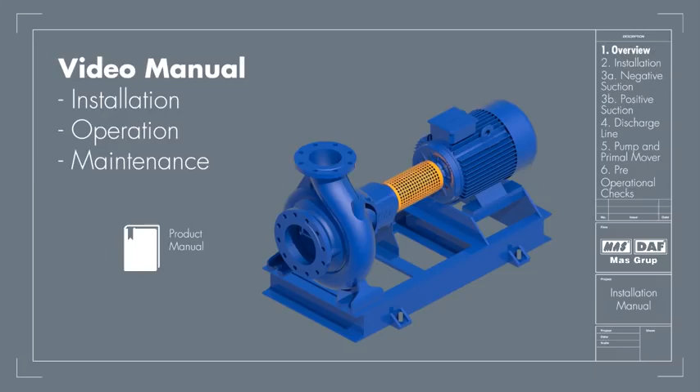Welcome to the General Video Reference and Guide. Please read the product manual before installing the machine to get knowledge of how the pump works and how to install it. This is a brief overview and demonstration of the entire process covering the key points.

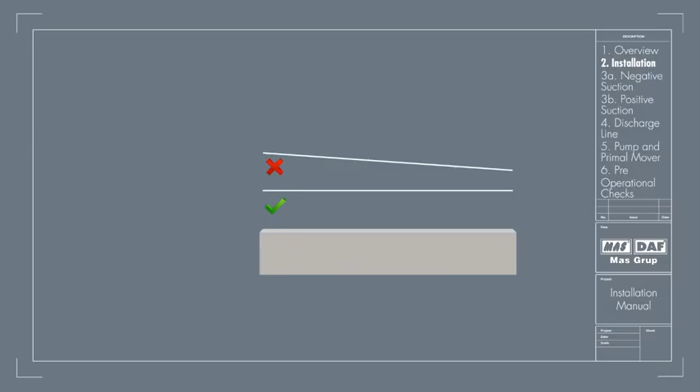Installation. Before installing the pump, ensure that the foundation on which the pump will be installed is prepared well. It has to be sufficient enough to take the weight of the pump and absorb any possible vibrations from it. The foundation has to be absolutely straight without any inclination. The foundation bolt of proper size should be embedded in the concrete and base plate.

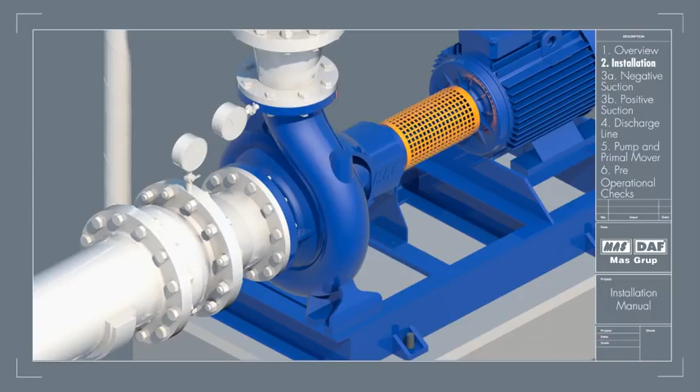Piping associated with the pump must be supported independently of the pump and should never put any strain on the pump casing. When the pipes are not supported, their weight is carried by the pump casing, and this situation may cause cracks on the pump casing. It's important that the connections are aligned axially, angularly, and in length carefully.

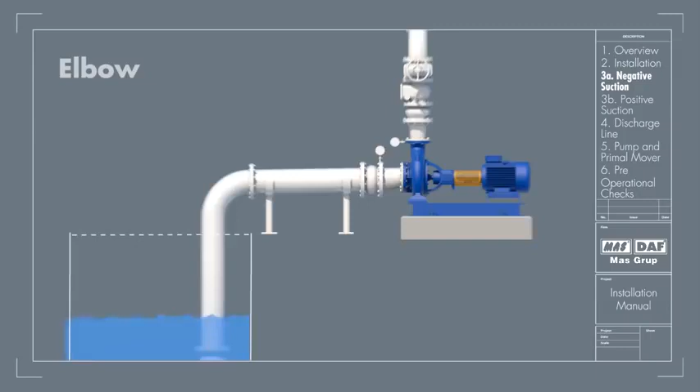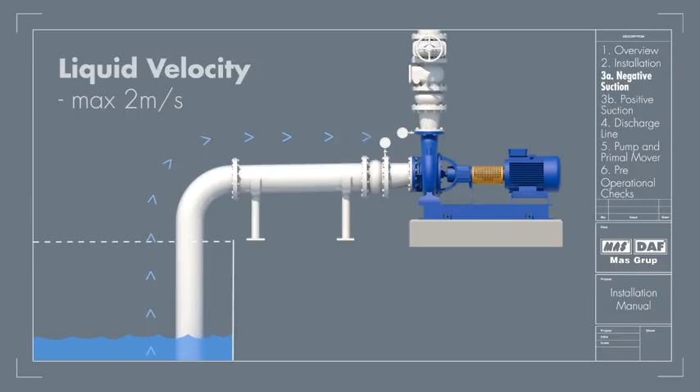Suction line, negative suction. The piping and the connection fittings should be properly aligned and supported separately. The elbow should be of long radius type. All suction piping must be airtight. The suction pipe should be sized to ensure a liquid velocity of not more than 2 meters per second. The suction pipe's size should be at least one commercial size larger than the pump inlet.

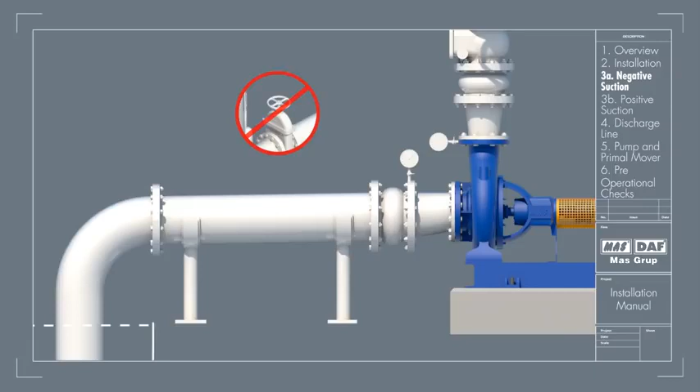All suction pipes should have a continuous rise to the pump suction inlet. 6 mm to 100 mm slope is recommended. No isolation valve is recommended. There should be a pressure tapping provided for installing a vacuum gauge in the suction line.

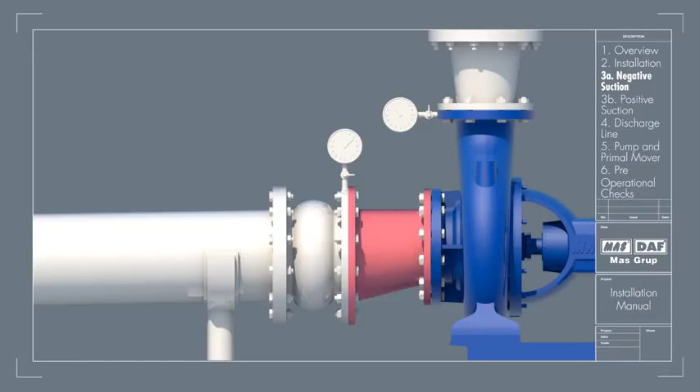The reducer joining the straight length of the pipe in the pump line should be an eccentric reducer with the inclined side of the reducer as the bottom side. The straight length of the pipe after the eccentric reducer should be 2 times the pipe diameter. The suction strainer must be at least 4 times the suction pipe area, and the mesh size should screen out solid particles that would clog the impeller.

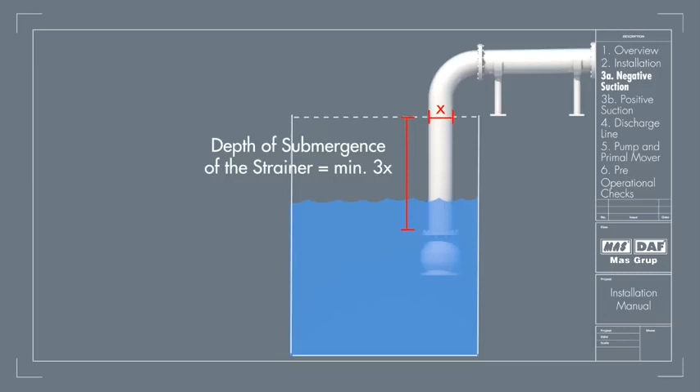The minimum depth of submergence of the strainer should be at least 3 times the pipe diameter, measured from the upper row of holes of the strainer. The distance between the bottom of the strainer and the floor of the tank should be 2 times the pipe diameter.

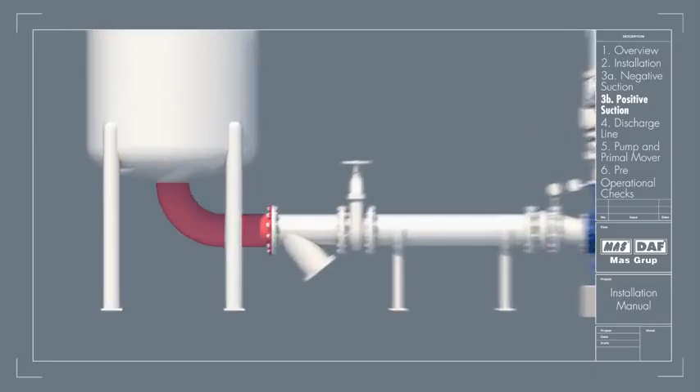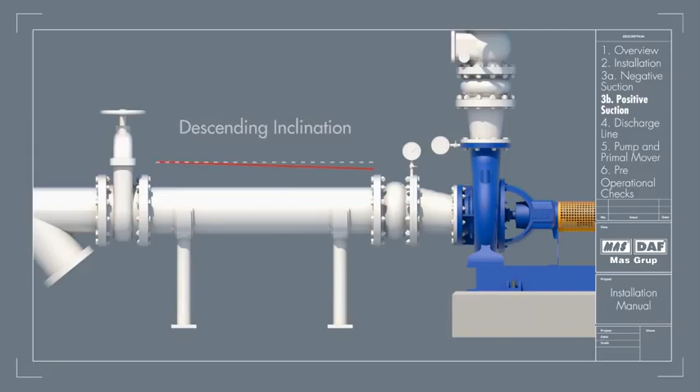Suction line, positive suction. In case the water is being supplied to the suction through gravity, a slightly different setup is needed. The elbow should be standard type or long radius type. An isolation valve should be provided in the suction line. The pipe from the tank to the pump should have a descending inclination. The straight length of pipe between the pump inlet and tank should be at least 3 to 6 times the pipe diameter.

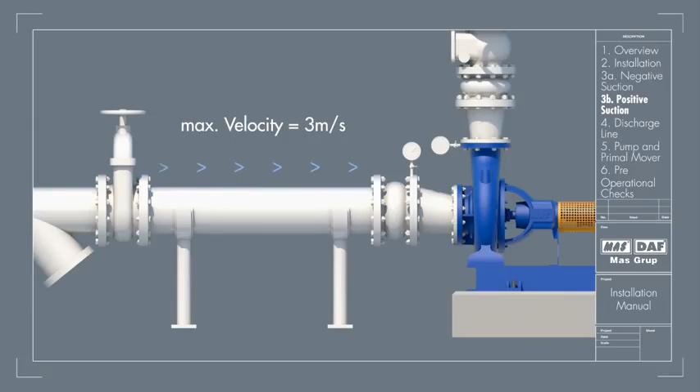The suction pipe should be sized to ensure a max liquid velocity of 3 meters per second. There should be a pressure tapping provided for installing a vacuum gauge in the suction line. The reducer joining the straight length of the pipe in the pump line should be an eccentric reducer with the inclined side of the reducer as the bottom side.

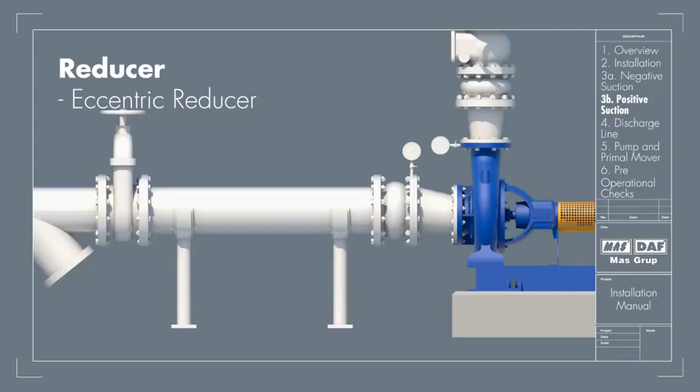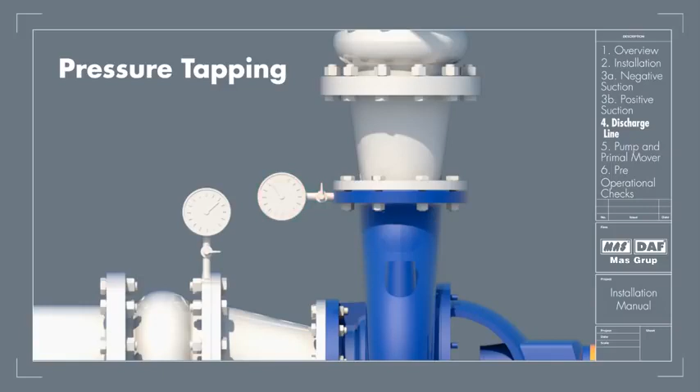Discharge line. There should be a pressure tapping as close to the pump outlet and before the isolation valve as possible to measure the pump shutoff head. A concentric reducer is installed on the discharge side to minimize the friction losses. To prevent reverse flow and protect the pump from hydraulic shocks, a check valve has to be used in the discharge line.

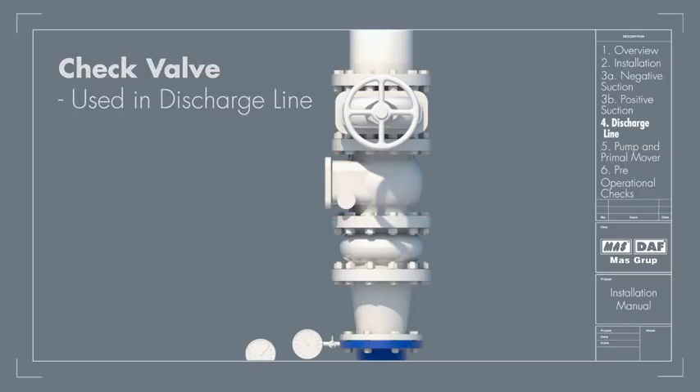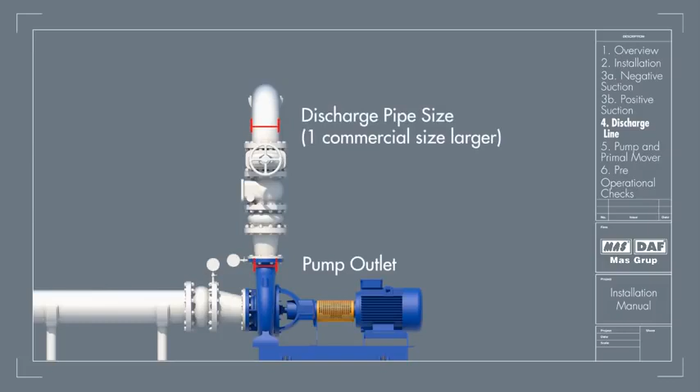The isolation valve is provided downstream of the check valve so that these can be taken up for maintenance, priming, and starting whenever required. Discharge pipe size should be at least 1 commercial size larger than the opening of the pump outlet. The number of fittings and size changes should be minimized to prevent fluid friction losses. Expansion joints may be used only after a careful piping analysis, especially when the discharge pressures are on the higher side.

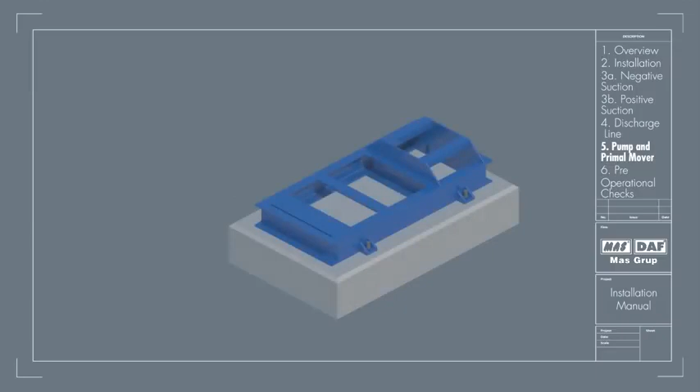Installation of pump and prime mover. The pump unit needs to be fitted using nuts and bolts before fitting in any pipes. The pump and the motor are aligned to the final tolerance using a reverse dial gauge or laser alignment tool. After the alignment is completed, the piping connected with the pump should be built. Once this is completed, the alignment of the coupling should be rechecked.

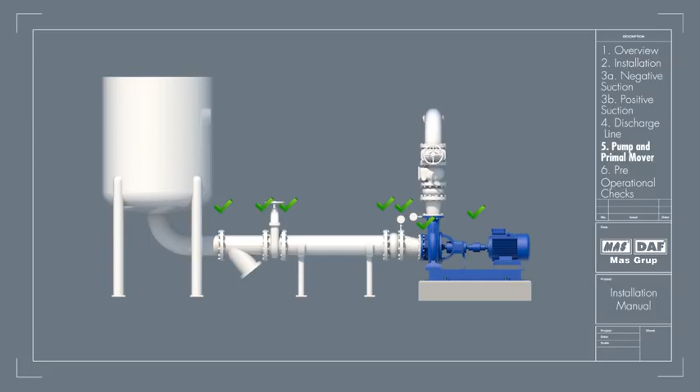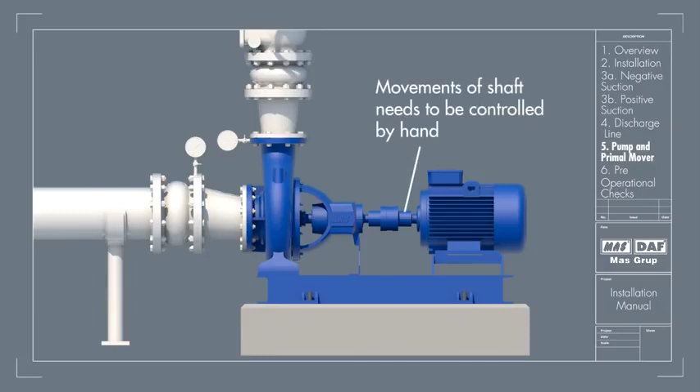Then the alignment of all piping and fittings should be rechecked and suitable corrections should be made. The motor should be wired correctly to ensure the correct direction of rotation. When the pump and motor have been coupled, movement of the shafts should be checked manually by hand to see if it is rotating smoothly.

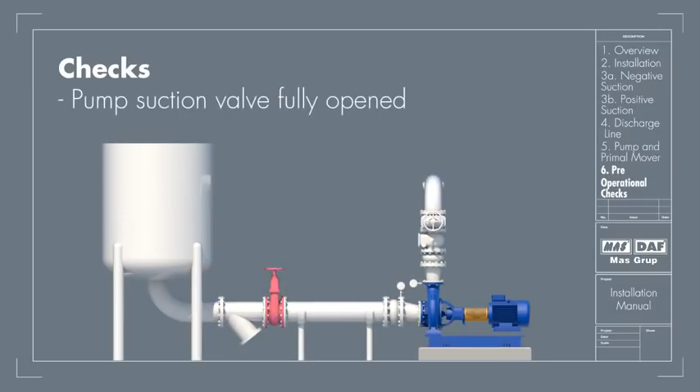Pre-operational checks. After checking alignment of the coupling, assemble the coupling guard and tighten the bolts. Ensure that the pump suction valve is fully open and all joints are checked for any leakage. The discharge valve should be kept closed to prevent overloading the prime mover.